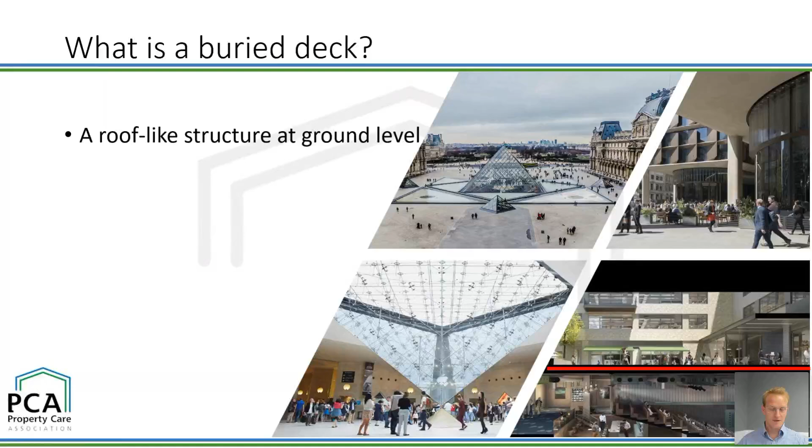Just an aside on this - Dr Ricky, apologies, I can't remember his surname, but he's going to be covering some of the nuance of fire and water and the interaction between them at the waterproofing conference next month in November. There's an interesting history there between fire, smoke vents and things like that, and waterproofing, because these are really challenging waterproofing elements.

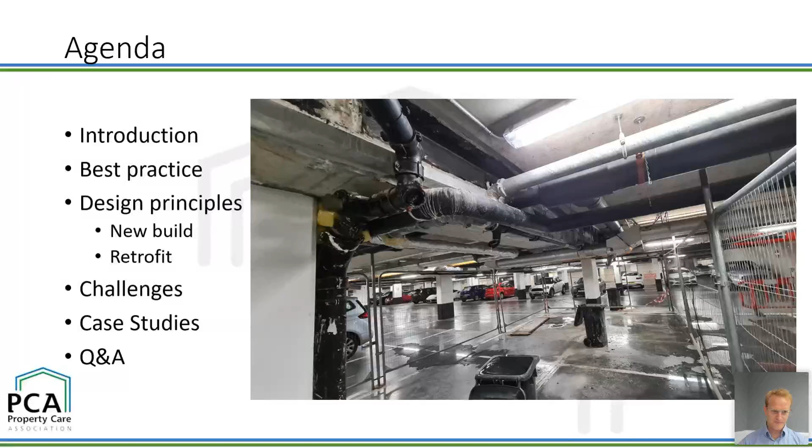So my name is Ben Hickman. I'm currently the chair of the PCA, although very soon I'll be handing over to Emily Walker, who many of you will know. She's excellent at waterproofing and will be a great addition to the PCA as well.

I'm the founder of CLW, and this week has been really exciting. We've had Andrea start as our practice director, so I've got a team that I'm really, really proud of. Andrea's an architect, Johnny's a structural engineer, Alan's an architectural technologist, and I've got various sort of backgrounds. So a team of 4 very accomplished and qualified waterproofing consultants.

We love working on big, complex basement waterproofing schemes. There's a QR code there that will take you to my LinkedIn profile, which is my social media poison of choice. I'd love to connect with you there. Vector is another company that I co-own, and we do really complex leak detection, a lot of that's to do with basement podiums. That's why I'm mentioning that, and I'll cover some more of that later.

I was on the committee that did the revision of BS 8102. I was a technical author of CIRIA C817, which is about blue roofs. I do a lot of expert witness work, and I've got some qualifications.

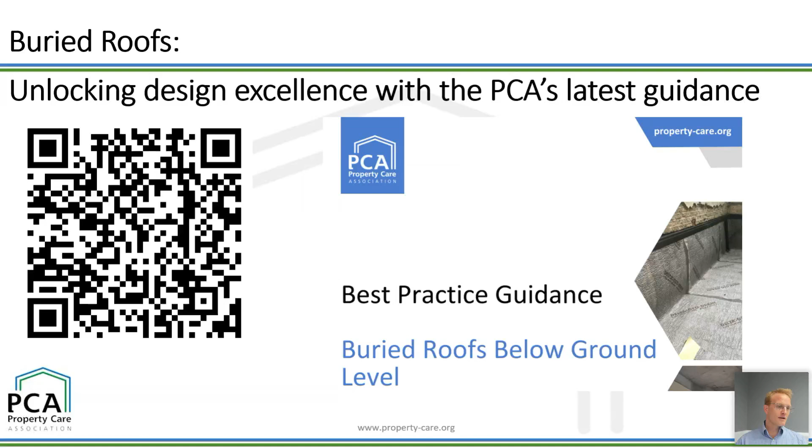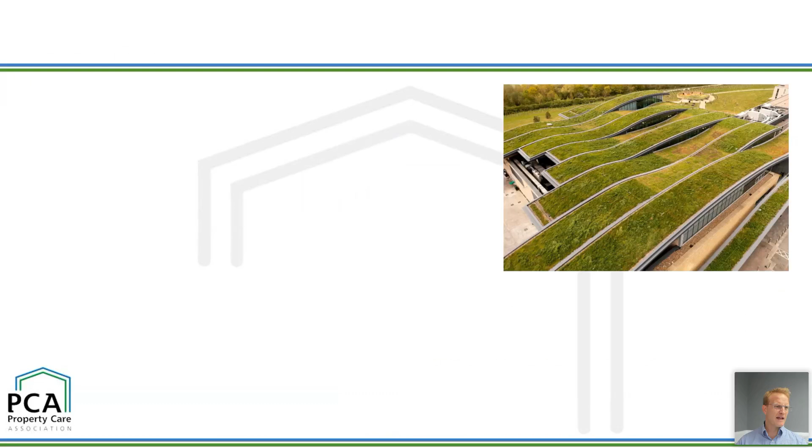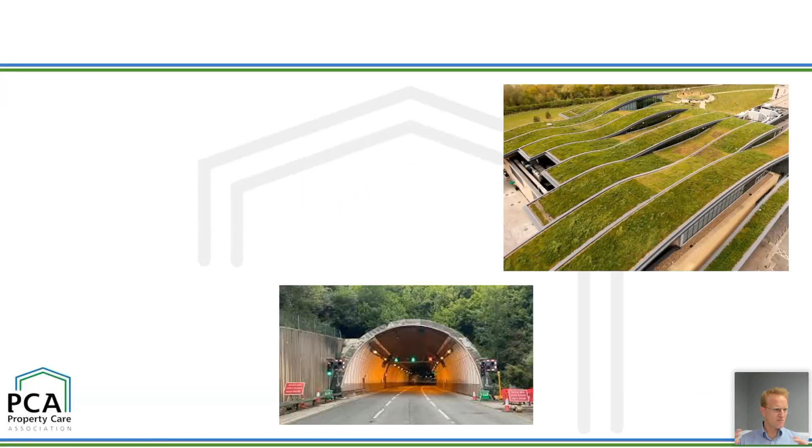So, what is a buried roof, and is that any different to, for example, what's here is a green roof, a really complex green roof, and that is a roof, and it is buried. There is a sort of planting of some sort on top. Here's another building element, and it's buried, it's a tunnel, and it's got a roof kind of structure. Is that a buried roof?

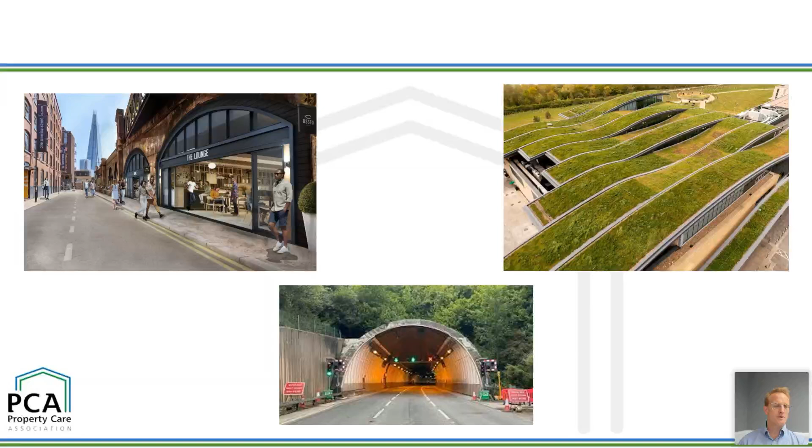And here's another example of a commercial premises in the brick arch vaults of a railway bridge. Are those buried roofs? Sort of, and sort of not, and it's difficult to differentiate and define, but there are certainly elements of a roof, and the roof primarily is a structure that protects the rest of the structure from the elements, particularly water. All of these structures are doing that, and buried roofs below ground level are also doing that. However, there's some nuance and some difficulty and challenges.

And here's an example, this is an AI generated image, but because buried decks at ground level are at ground level, it is feasible in lots of circumstances that you might have, for example, an emergency vehicle. The dynamic loading that introduces is really quite significant. How do you design for that? I showed an image previously that had a MEWP on it.

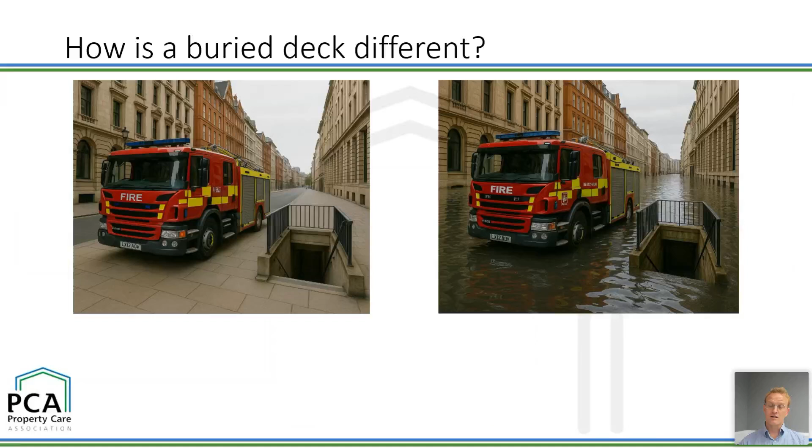Now, obviously, that introduces loading that you wouldn't necessarily plan for. And that loading goes all the way from finishes through potentially drainage layers and things like that, through to the structural deck. That brings in some challenges and difficulties. And here's another kind of challenge and difficulty at ground level that you don't have on roof structures, which is flooding. Surface water flooding in cities where you get a lot of these structures is increasingly common, and brings some real challenges about how do we waterproof these structures.

So best practice guidance - I've mentioned BS 8102, the guidance on protecting below ground structures from water ingress. BS 6229 is about flat roof structures, and there's a lot of comparable and relevant information there. This PCA guidance is very relevant. And I mentioned blue roofs because there are some similarities there, and very often a blue roof is placed on a ground level buried roof.

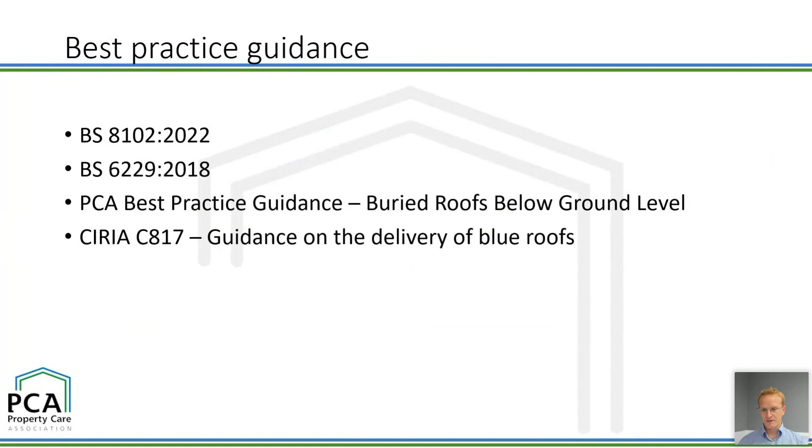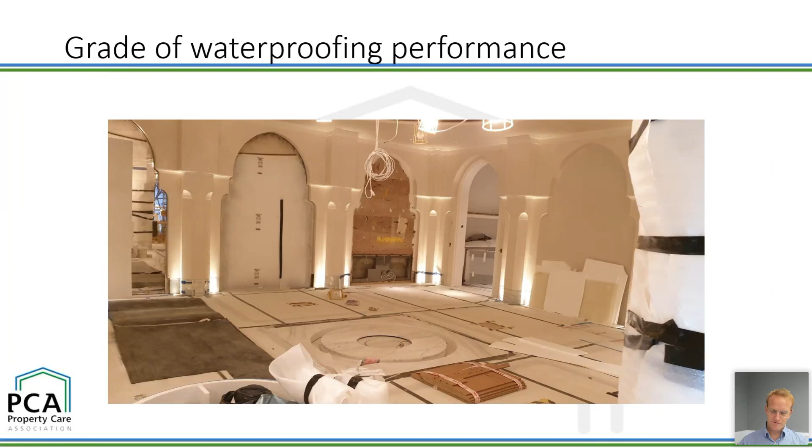So if we start with BS 8102, we should begin with a desktop study and looking at the structure. And then very importantly, how dry do we need that space to be? What's the grade of waterproofing performance? This image is of a very, very posh environment that obviously needs to be dry.

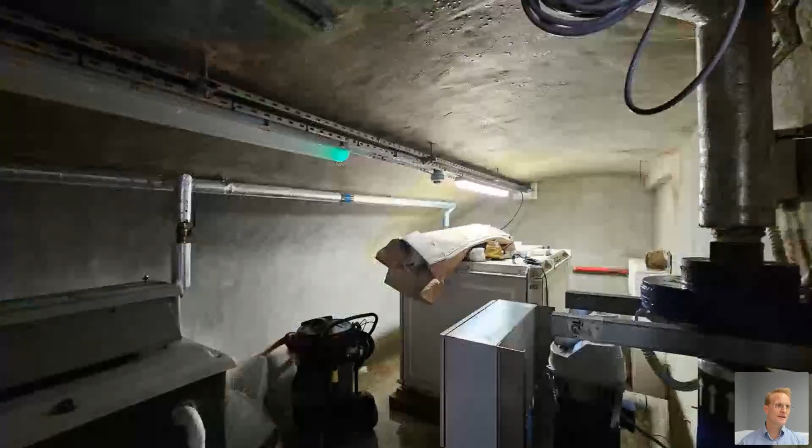This image is of a very rough environment that perhaps doesn't need to be dry - that's a sort of London Victorian coal chute, coal store space. Does that need to be dry? You could debate it. Here's a similar structure, and it's got some type A cementitious waterproofing, and it's containing some plant space. Is that performing adequately? There's condensation up on the soffit.

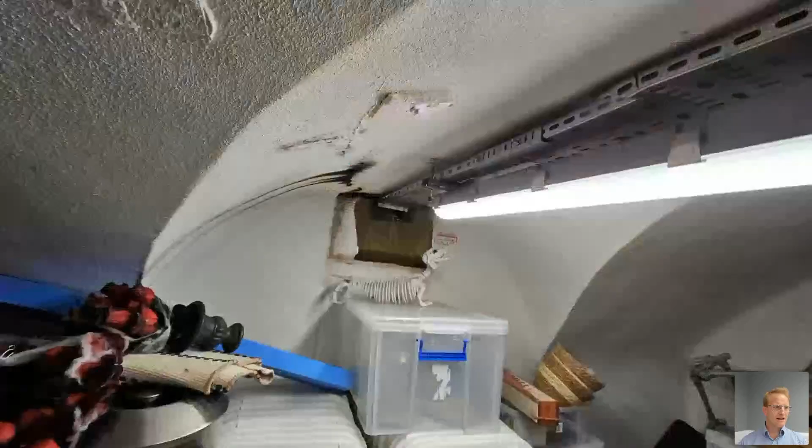Maybe, maybe not. And here's the same structure in a slightly different setting. Is that performing adequately? How dry do we need that to be?

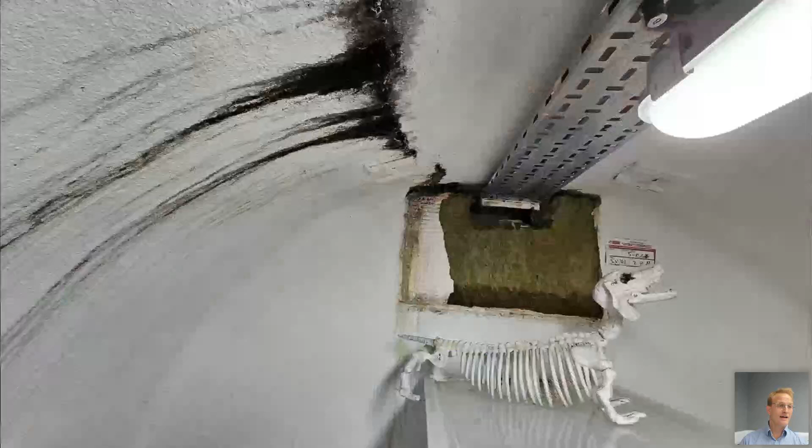I laughed when I saw this on site because there's this very bizarre dog skeleton. But you can see there has been some ingress through the cementitious type A system. But what really caught my eye is that there's this fire compartmentation that's clearly been damaged by the water. And if I zoom in a little bit, there's your fire compartmentation and the dog skeleton.

And the seal - the fire compartmentation people have put a sticker next to the seal saying, if this is damaged, please report immediately. Again, the fire component is very significant when it comes to these buried roof waterproofing elements.

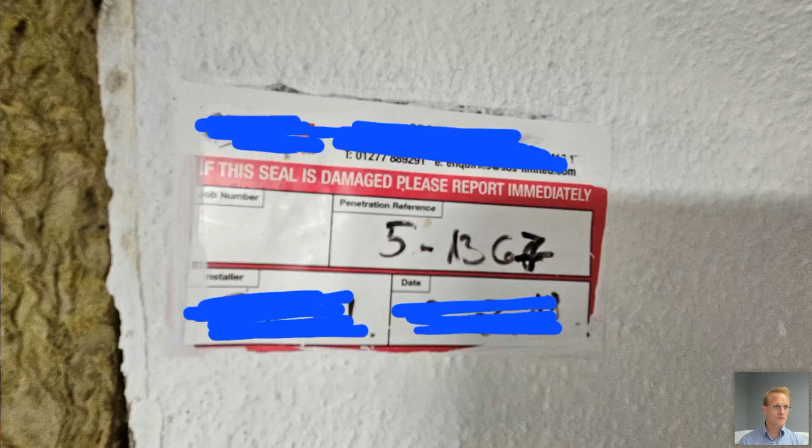So when we ask ourselves, how dry do we need this to be? Often it's not as simple as the finishes, which is how I would normally think about it, or if it's a plant space, maybe it doesn't need to be quite as dry as the posh residential below ground space. Fire compartmentation, if that's getting wet, can have very serious implications, and post Grenfell we should all be very aware of that.

And if you were to combine the risk of perhaps an EV, an electric vehicle fire, which is very high temperature and very hard to put out, with a below ground space, so there's very little room for heat to dissipate, and a steel frame structure where the fire protection is damaged, that's really quite concerning and could lead to rapid structural collapse, for example. So when we think about what grade of waterproofing performance we need, I would urge us all to think about fire and other fixtures and fittings.

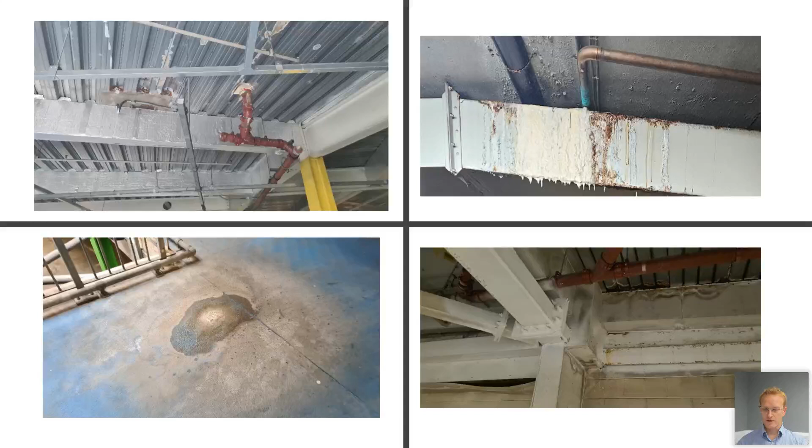I've been called to one where the fire alarm system was being damaged by water dropping onto the fire alarm sensor. And so the fire alarm was going off all the time on this commercial premises. That was having a big impact.

There's lots of leaching from the concrete. If you leach lots of minerals out of the concrete, you lose the passive protection, and then the rebar can corrode, and that can cause spalling. So you've got popping of concrete on a structural element that has significant punching forces. So again, structural implications - how dry do we need it to be is a very important consideration.

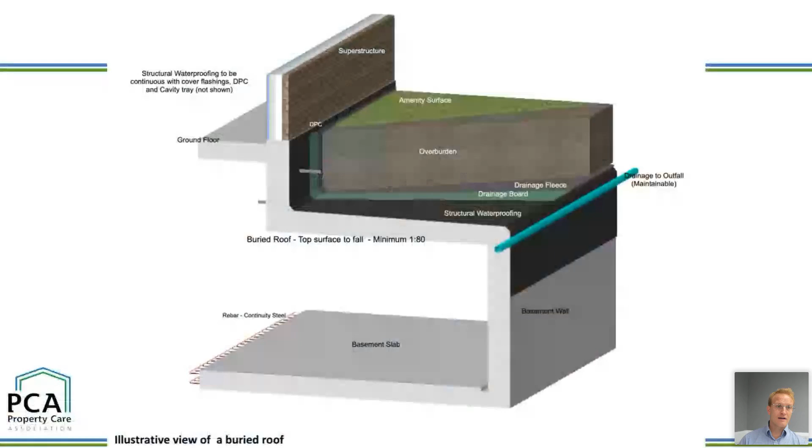What else matters when we think about waterproofing design? Here is an image from the PCA guidance document, and you can see the complexity. There's lots going on here. We've got a deck that's cast to falls.

We've got a waterproofing layer, a drainage layer, and land drains. Land drains need to be able to discharge somewhere with permission - that's tricky, and it needs to be maintained. There's all of the nuance of how you terminate this and interface with the DPC. This doesn't have any insulation, so is there a condensation risk?

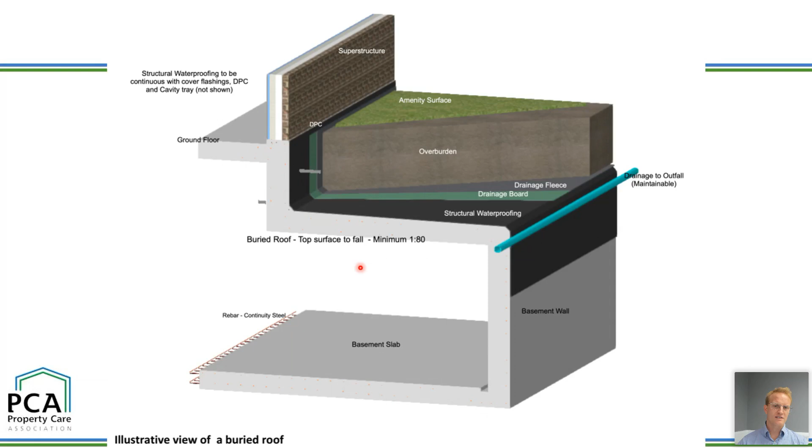So there's lots of complexity to a buried roof system. But one thing I want to highlight is the challenge that traditional design teams would have a lead designer for the substructure, normally the structural engineer, dealing with the foundations, and a lead designer for the superstructure, normally the architect. So if you've got somebody owning all the design responsibility and coordination above ground and the substructure, you can often get a gap between the top of the capping beam and ground level where you don't actually have a lead designer.

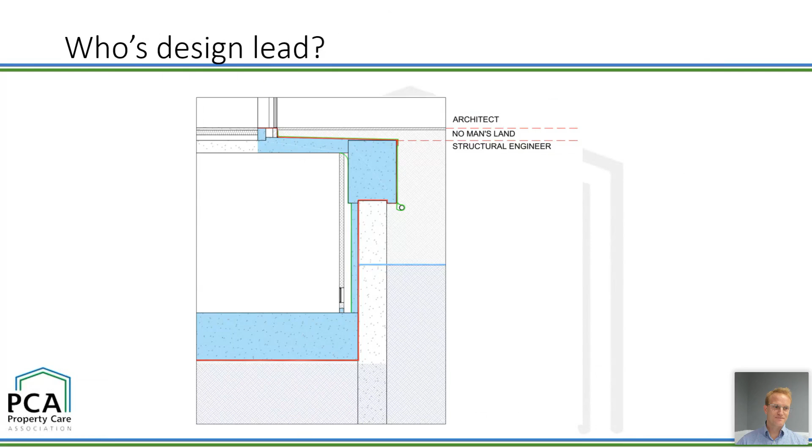And that's where all of this waterproofing design is occurring for a buried roof system in most situations. So it's a matter of a lot of significance and has a big impact in our world.

So what is the design philosophy? Firstly, I'd want to point out that we need to have a waterproofing specialist, and BS 8102 highlights this - particularly for a cavity drain system installed to a soffit, but inverted applications are deemed to be higher risk, and therefore specialist designers and installers should be included from the outset. So there's a particularly high risk element highlighted in BS 8102.

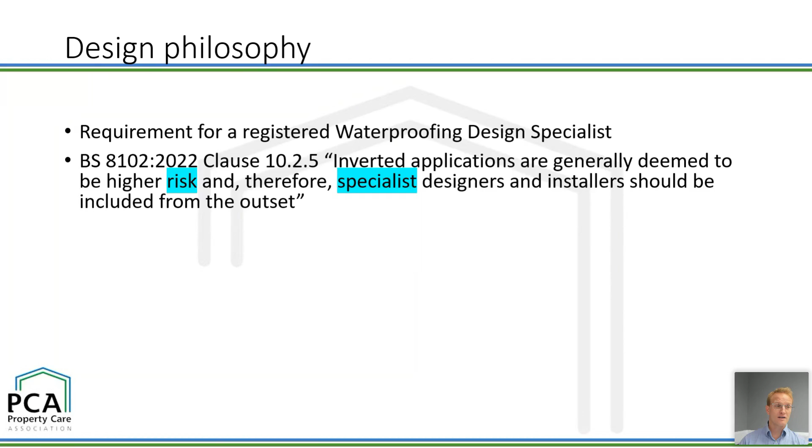This PCA guidance document also highlights the need for a waterproofing design specialist. And then also in BS 8102, clause 4.2, a waterproofing specialist should be appointed. And that's a very important word - it's very contractual sounding.

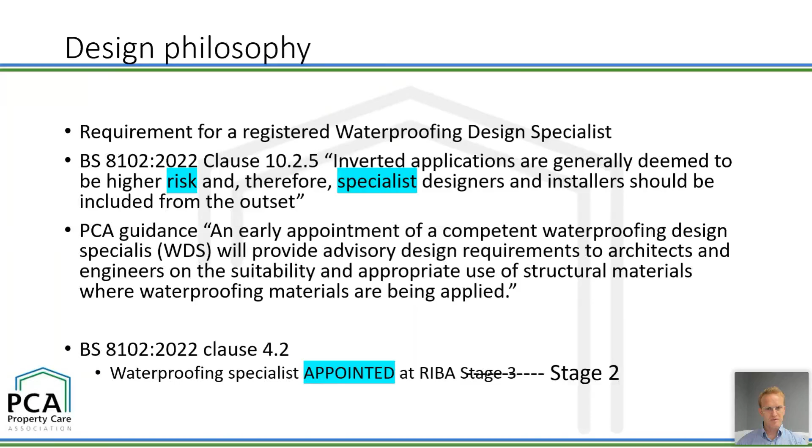A contract is offer plus acceptance plus consideration, and that's very important for the end users and the clients. Not only was a waterproofing specialist somehow involved in advising on the waterproofing design development, but they actually are appointed, which means they're responsible, and there's recourse if they gave bad advice. This mentions appointed at RIBA stage 3 - I'd actually highlight it would probably be better to have them at RIBA stage 2.

I also want to point out this concept that there are things that we know, and there are things that we know that we don't know. But there's this very interesting element of things we don't even know that we don't know. All of our professional standards or codes of conduct would be very explicit that we should only do work we are competent to do - we shouldn't go beyond the area of our expertise.

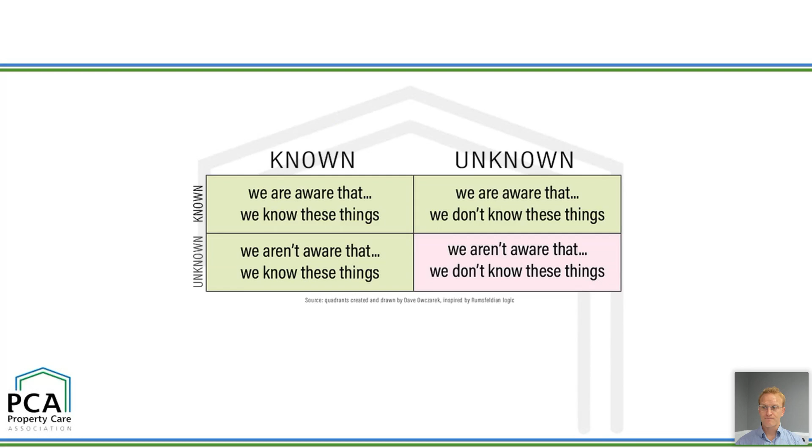And on buried roofs, I see a lot of architects in particular taking on the design development, and really, they're not waterproofing specialists, and they don't even know that they don't know some of the issues at play here. That's a very risky thing to do, something I'd urge you not to do. Really, you should appoint a waterproofing design specialist.

I also just want to labour some of the contractual risks. It's very important that we are aware of these, because I don't want people to get into difficult situations with claims of professional negligence.

I mentioned that I do a lot of expert witness work. I was recently on a call with two solicitors and a barrister as they prepared some documents, and they were asking me what is the standard you would expect from a competent waterproofing contractor, because that's the test for negligence. If you do something that's not even as good as the standard we'd expect from a reasonably competent waterproofing designer, that's negligence. I was explaining to the barrister, well, actually, I think most people in the industry wouldn't do X, Y, Z.

I would urge you, if you are a waterproofing specialist involved in designing something, the burden on you is really quite significant. It's not enough to take comfort from 'oh, so-and-so does it like this as well.' This has really come to the fore since Grenfell, and the phase 2 report states very clearly this burden on professional designers.

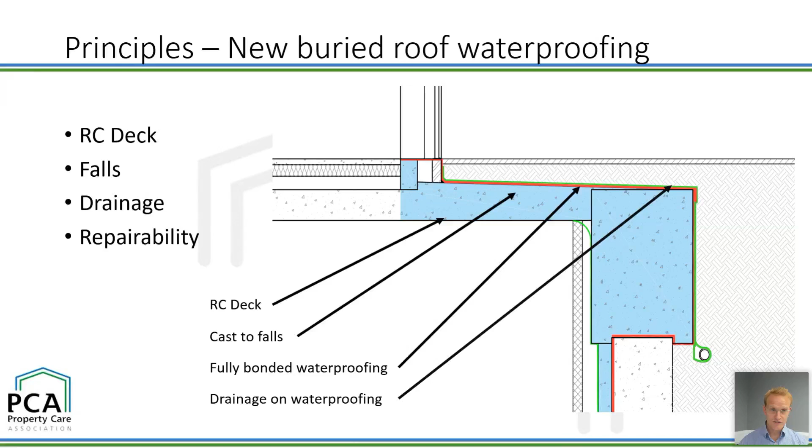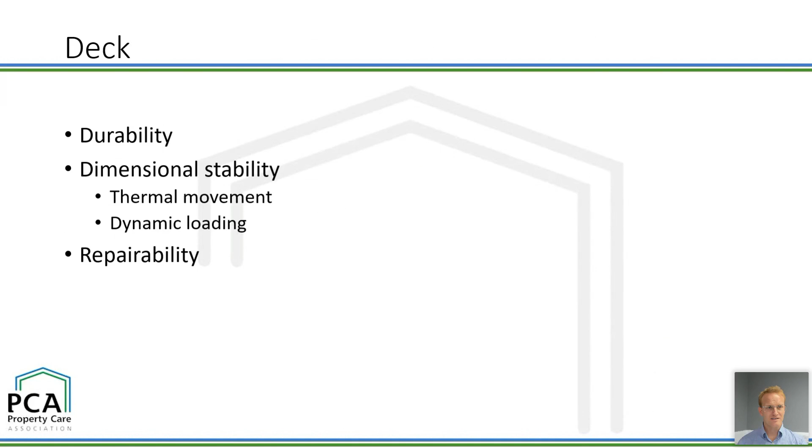So why would we want a reinforced concrete deck? That's quite a reasonable, legitimate question. I've summarized some of the things here, and then I'll show you a bunch of images and talk through in more detail. Firstly, we want durability - if there is water ingress, what happens? Concrete is more durable than a lot of the other options. We want dimensional stability because that really helps the waterproofing. And we want something that is repairable. I'll dwell on the repairability quite a lot - bear with me, I hope that's valuable.

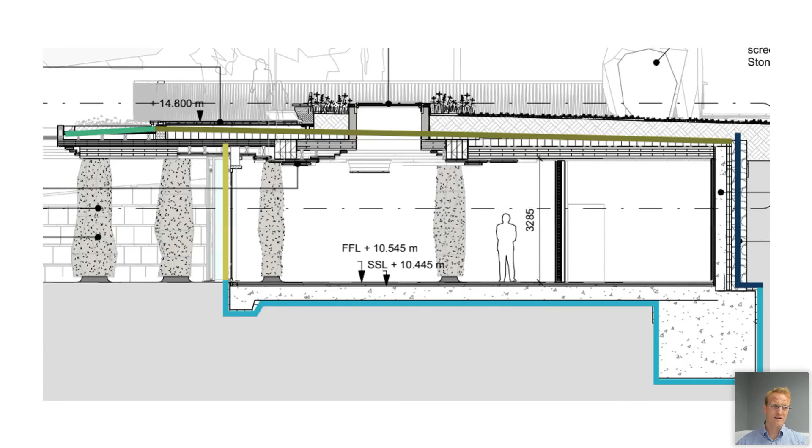So firstly, durability. Here's a picture of a development, and it's into an incline, and the architects came up with some lovely detail about the lawn flowing over the structure. This here is the green roof, but it's a green roof on a timber deck. I saw that and was very nervous and thought, I don't think that's an okay design. They've since changed that design.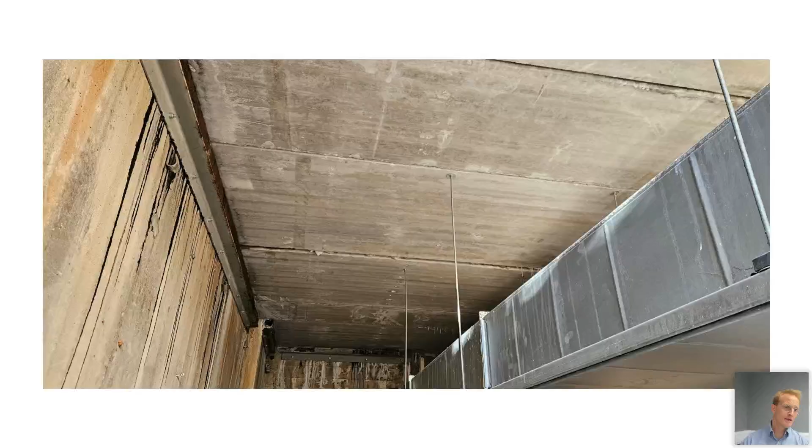And here's a composite metal deck, I showed you that image earlier. There's a real challenge with composite metal decks where if you get water coming through the podium, it sits within the concrete and sits on top of the permanent formwork, which is largely waterproof, and then comes out through penetrations or joints. Again, the point of ingress has no correlation to where the defect is in the waterproofing.

And finally, here's a reinforced concrete deck, and it's dimensionally stable, and it's durable, and it's potentially repairable. We'll talk about that in a second. I'm just going to take a swig of my tea.

So we want a reinforced concrete deck, and we want falls. I just wanted to labour this - there seems to be a lot of misunderstanding about zero falls. The roofing industry is full of this. It's quite frustrating, where flat roofs aren't flat, and zero falls actually means you need falls. In CIRIA C817, we came up with a new term of absolute zero gradient, which means that you need to have a slight gradient.

So just be aware, on all buried roofs, you need falls. Even if you find a product that says 'oh, you don't need falls, this is approved for zero falls,' you still need falls. Back falls are not acceptable, and you need to allow for deflection.

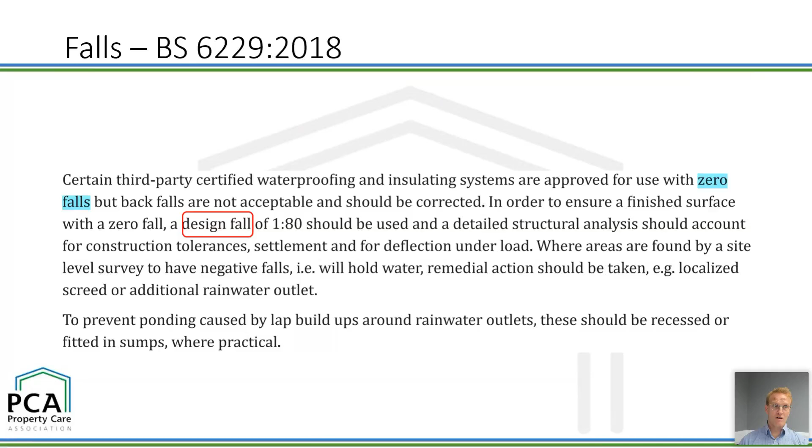So yes, we must have falls, and if there are dips in the deck, they need to be removed. And I would also highlight that outlets often need to be recessed in the podium deck.

Typically, our threshold level will be set by highways and proximity to highways and access, and that's normally a very fixed position. And then we would have somewhere over here a capping beam, and again, that's a very fixed position. And then we would normally have a services zone, and we can't go below that.

Structurally, and cosmetically, you normally want outlets near the columns so that you can hide them. But the point of greatest deflection is exactly midway between two columns. And so we've got to achieve the 1 in 80 fall above the deck. And then also the drainage needs a fall in order to get self-cleaning. All of that is coordination heavy.

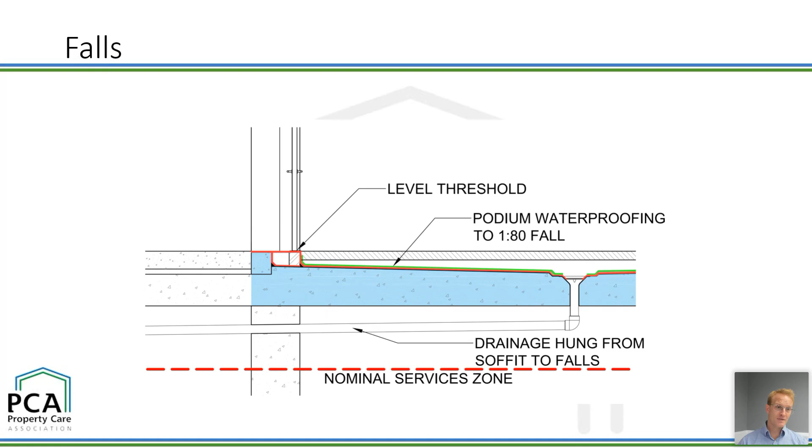And then obviously we want drainage, and we would all be familiar with, there's a drainage layer in terms of how much drainage, how many outlets. There's BS EN 12056 and some calculations around that, rainfall intensity and things like that.

And then you'd have queries about, well, how much of that water do we think is going to go into the surface water drainage and the ACO channels, and how much will percolate down and hit the waterproofing layer? Lots of complexity, and more complexity to do with maintainability as well.

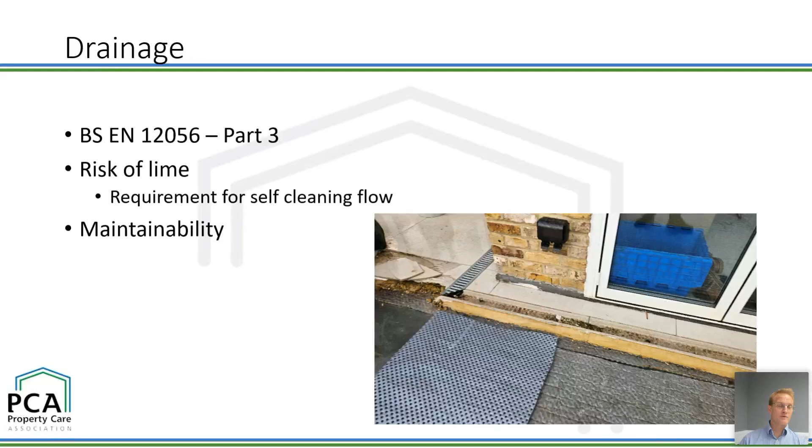And I think historically a roof has been, if you have a leak, you go up onto the roof and you fix it. But increasingly, roofs are buried structures themselves, and you would have photovoltaics and plant and green roofs and insulation. And actually, it's very difficult to find leaks on roofs now as well. And there's an increasing pressure to make sure that roof waterproofing is repairable as well.

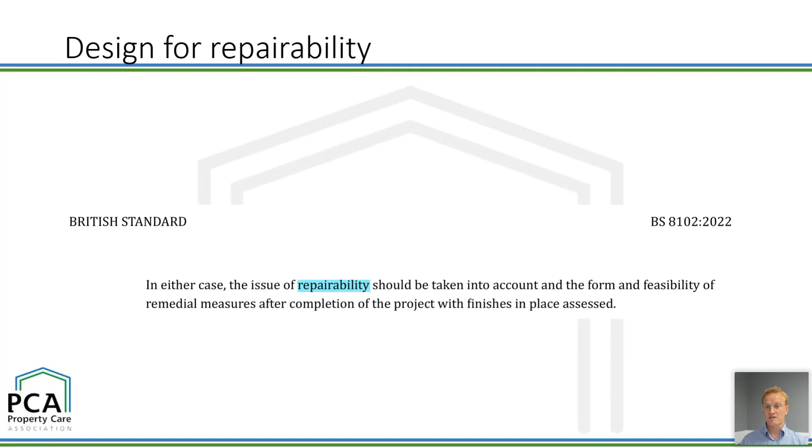But if you want to repair a buried roof waterproofing system, there are several challenges, but one of the biggest ones is, well, where is the leak? And another one is, well, can we get to it? And potentially, if we have a reinforced concrete deck and a fully bonded waterproofing system, maybe we can pursue a resin injection repair.

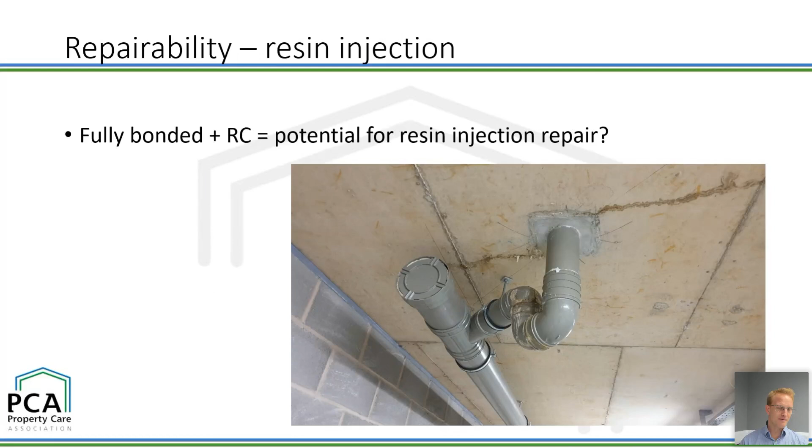They're often unsuccessful, and lots of challenges there, but let me dwell on the repairability piece for a moment, if I may. So if we want fully bonded waterproofing, that has to be adhered well to the substrate. And here is me doing an automatic pull-off test to say, yes, this is very well adhered to the substrate.

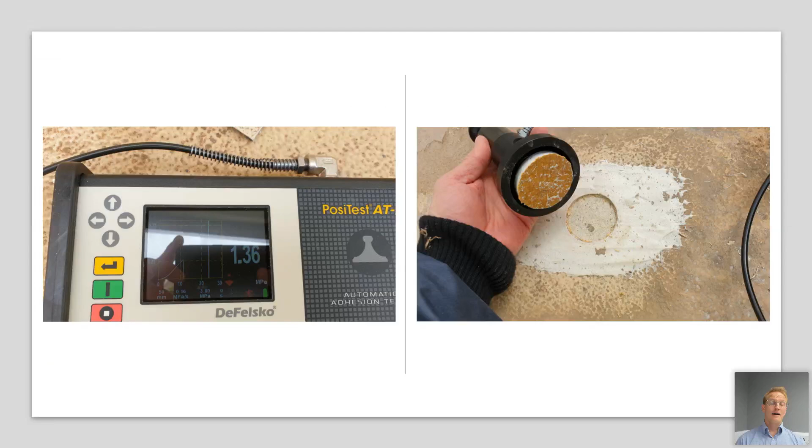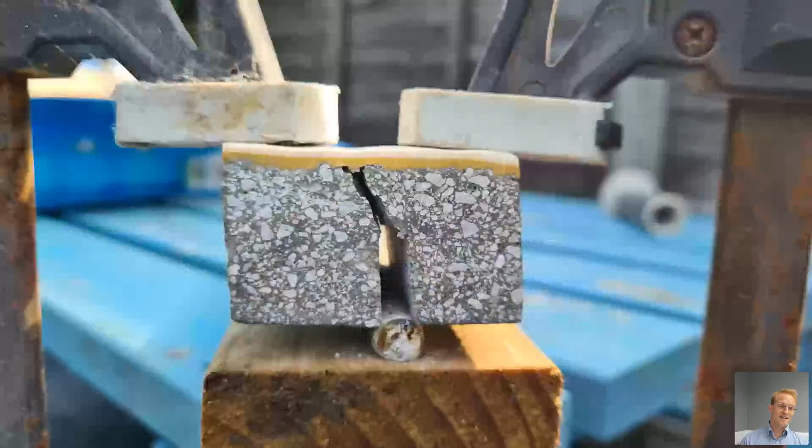But if it's well adhered to the substrate and the substrate has a crack in it, then the waterproofing has to stretch over that crack. And this crack here is 0.7 millimeters. And here is me showing a very crude experiment in my back garden on, here's fully bonded waterproofing, and that's onto a substrate. And I've created a crack, and then I'm stretching this upper surface with these clamps that are forcing down. And over here, you can see the waterproofing is having to bridge the crack.

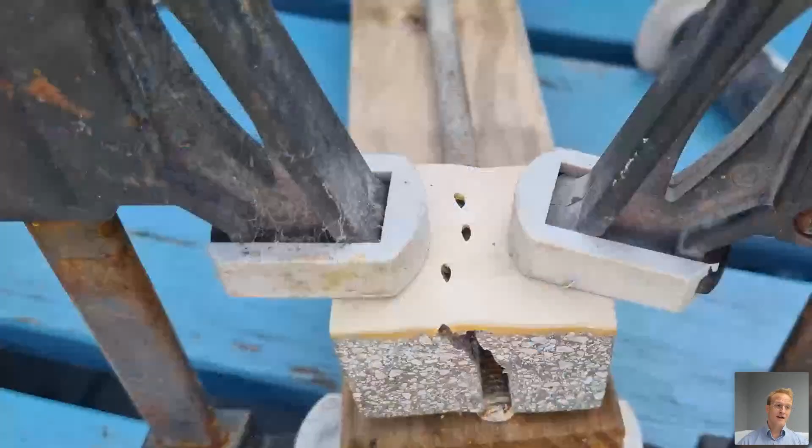And if you keep stretching and stretching and stretching, you get something like this. And these splits are holes in the waterproofing. And obviously that is a point of ingress. Now, this product is actually stretched a huge distance, but that's installed in lab conditions, and it's particularly stretchy material as well.

So there's actually a real benefit to something that isn't fully bonded, because much more of the material can stretch over cracks. And so we have this challenge here of, there are some benefits to fully bonded, because maybe we can repair it, and maybe we can do some resin injection, and maybe we're more able to say, well, this is likely where the defect is in the waterproofing, and that's likely to correspond well with where does water come in to the structure.

A loose laid system that's separate from the structure allows more of the material to bridge gaps, cracks, and movement, so there are benefits there. The challenge with something disconnected is this: you could have waterproofing at this level as a loose laid system, and if you've got a defect in this location, water can come through this void or insulation and spread all across your concrete deck, finding a point of ingress that bears no correlation to where the defect actually is.

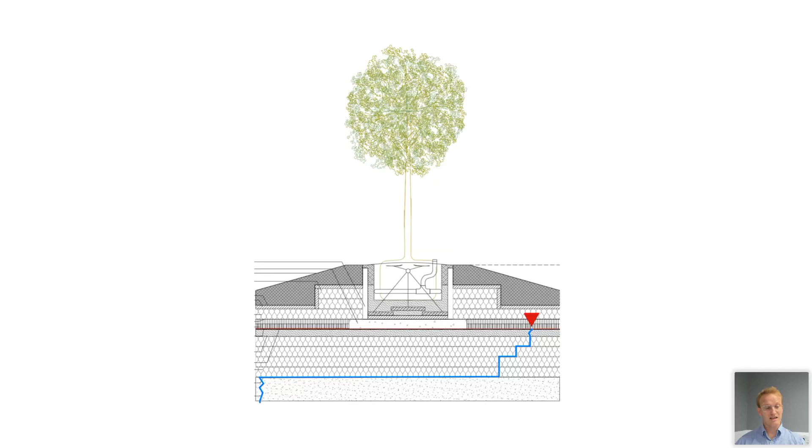And then is that repairable? Well, if you can't find the defect, no, it's not repairable. I guess the other challenge is if the defect is under your mature tree or under a tree planter, can you even get to that and repair it? There's a lot of challenge there. So repairability from above involves firstly locating it, then exposing it, and then making good.

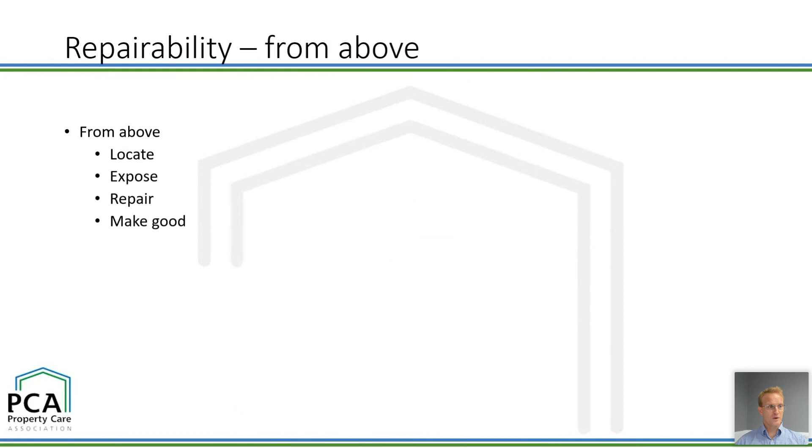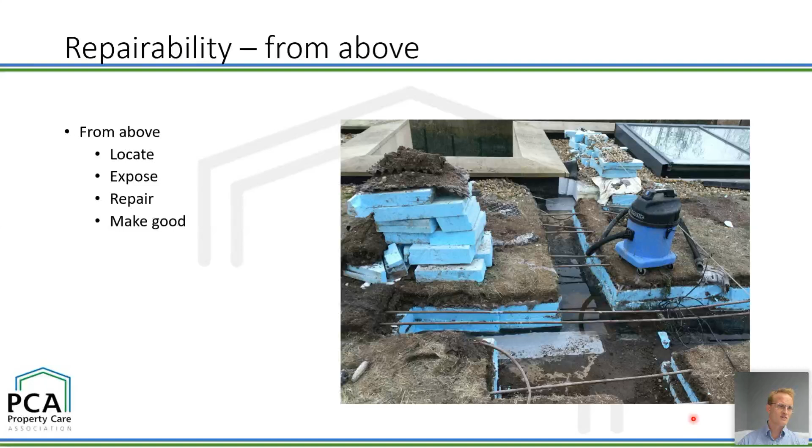Here's an indication of trying to locate a defect in waterproofing. You're removing different bits of overburden and trying to wet vac out so you can see the waterproofing layer, and in the process you're disturbing things like irrigation systems. Here's another one, a blue roof, where the ingress could be anywhere, and in the meantime you're damaging some of the blue roof system. It's difficult and challenging.

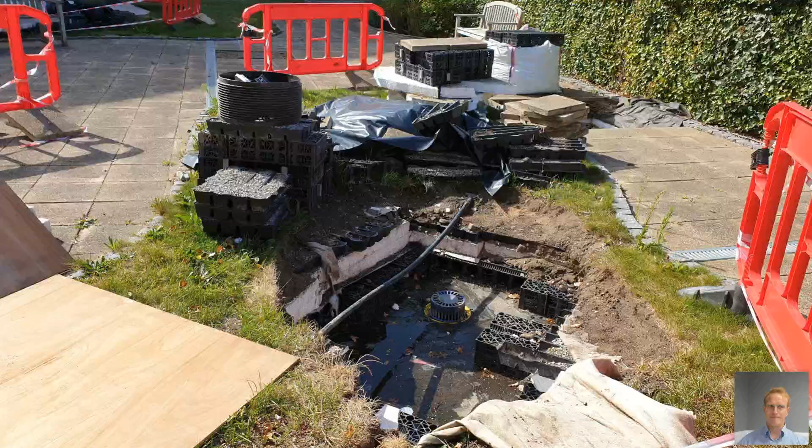That's what we do at Vector, where we've partnered with an organization in Germany and do very complex leak detection, which I'm really pleased with. We do lots of leak detection in green roofs and similar structures, mapping the electrical flow through these varied structures to say, our point of ingress is here, then we can do localized exposure and repair.

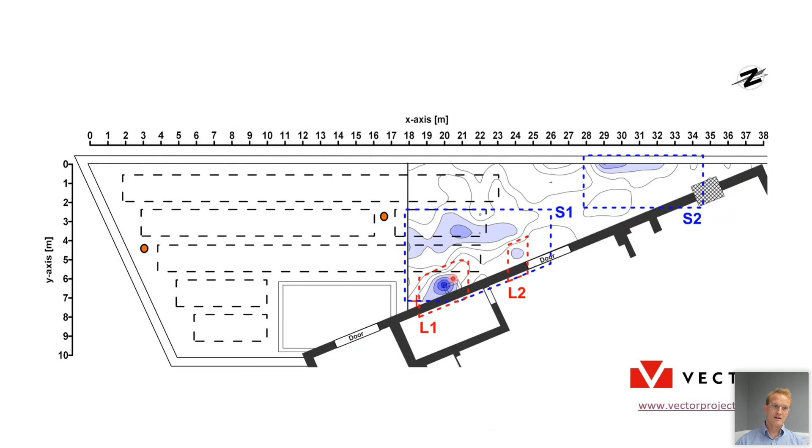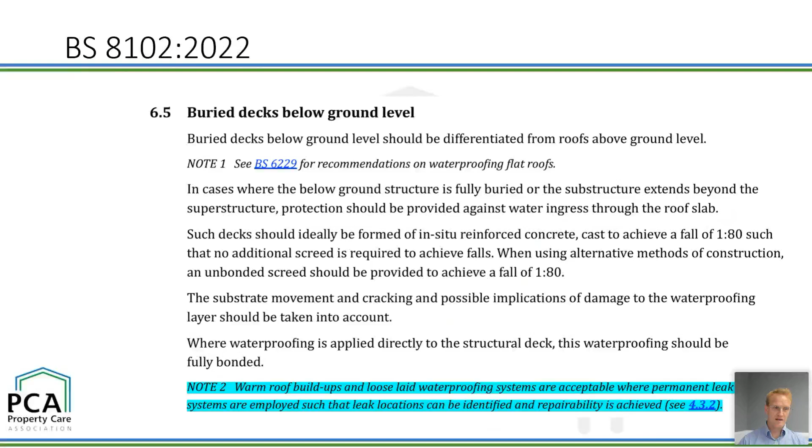I also wanted to highlight this because I think it can go unnoticed. In BS 8102, there's quite a clear note that says if you pursue a warm roof buildup—and there are a lot of benefits to that, where the insulation is kept warm and you can achieve falls through tapered insulation—if you do take that route and your waterproofing is disconnected from your structure, it's important to make sure the leak location is identifiable in order to make it repairable. So permanent leak detection should be employed.

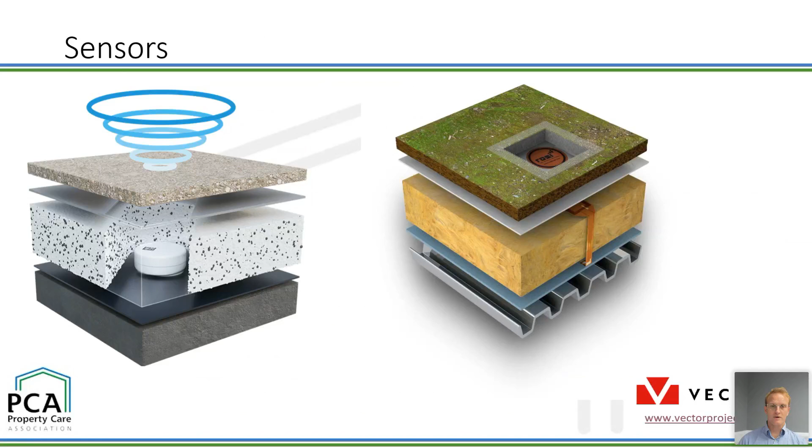Similarly, CIRIA 817 says the same thing. And again, this is something we provide at Vector, and there are several different options I'd love to chat about.

So that's all kind of new build design content. I think I'm running a little bit late, so apologies. What do you do if it's actually an existing structure and you can't get down to the deck from above to waterproof from above? Here's an example of what can be between the pavement and the structure you might want to waterproof—there's a lot of utilities, for example.

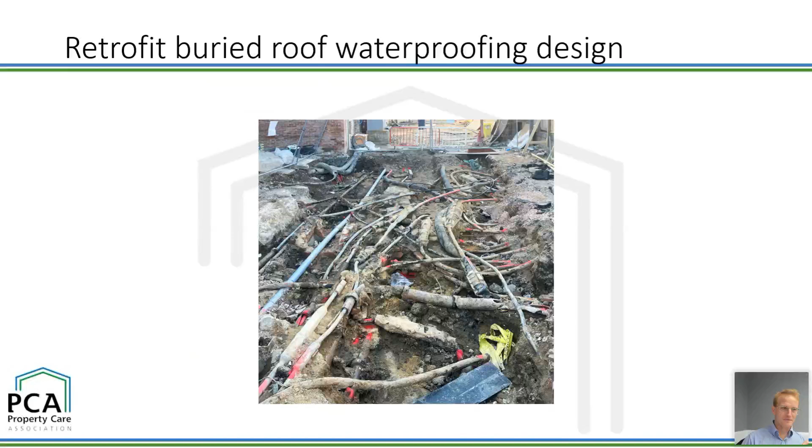Well, you've got immediate options of type A waterproofing, and I'll come on to type C, but type A has significant challenges with movement. I've already mentioned dynamic loading from, for example, a fire engine, but even if it's just near a road, the consistent movement can be particularly challenging for cementitious systems. Then we have big challenges about where to terminate that waterproofing, because it needs to finish at some point above ground level, and we can't necessarily get there.

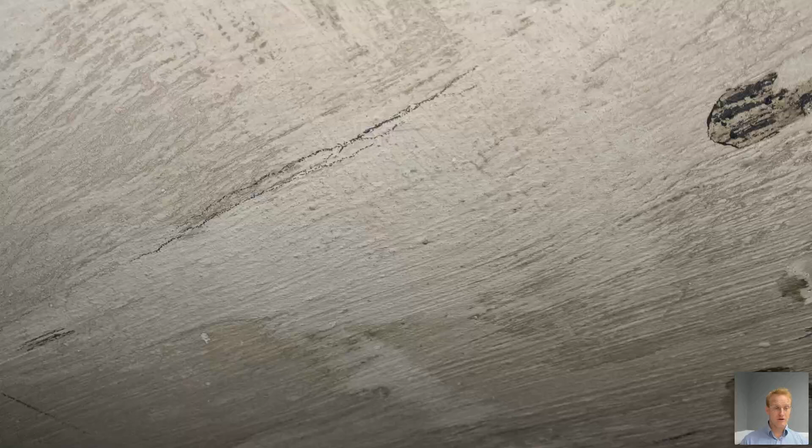Here's an example of a cementitious waterproofing system—they are typically very, very rigid, so if there's movement to the substrate, that's going to be problematic. This is one where somebody was trying to install it while there was active water ingress, so before the cementitious system was curing, water was coming through it.

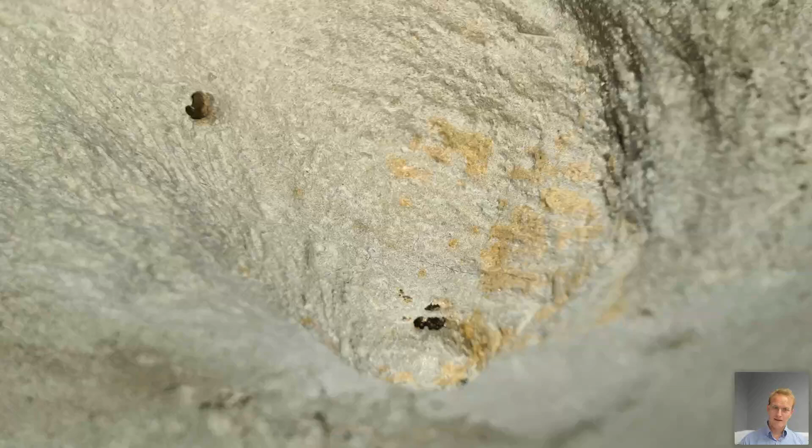And again, terminations are really awkward around an entrance, a door frame, or a downstand beam, anything like that—very difficult to design and install well.

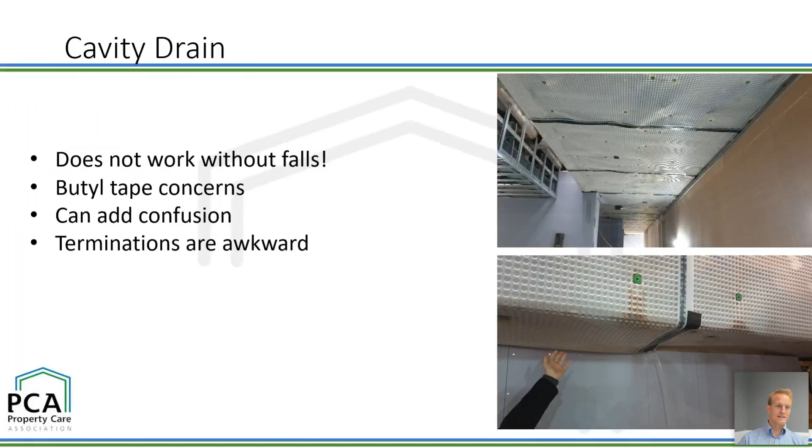Let me race through some other challenges and considerations. Condensation is a huge one and needs a lot of thought—we ought to be aware of vapor control layers, insulation, heating, ventilation. Termination I've mentioned a few times, but that's termination if it's above ground at capping beam level, but then also interfacing with a damp-proof course. You'd want that to be 150 mil above ground level. That gets awkward if you've got a level threshold or a door frame that needs to drain water, or anything of that sort. Movement joints are always tricky.

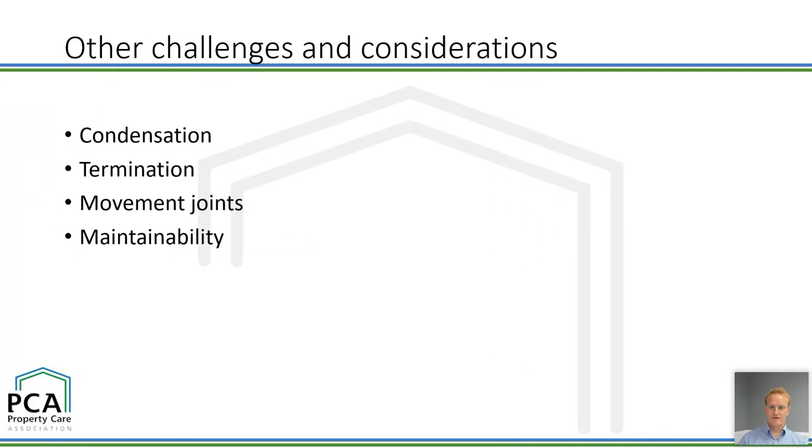Maintainability is very often overlooked. How do you get to the different elements and make sure that drainage is maintainable? And then lastly, flooding, which we've mentioned, but is obviously a big challenge.

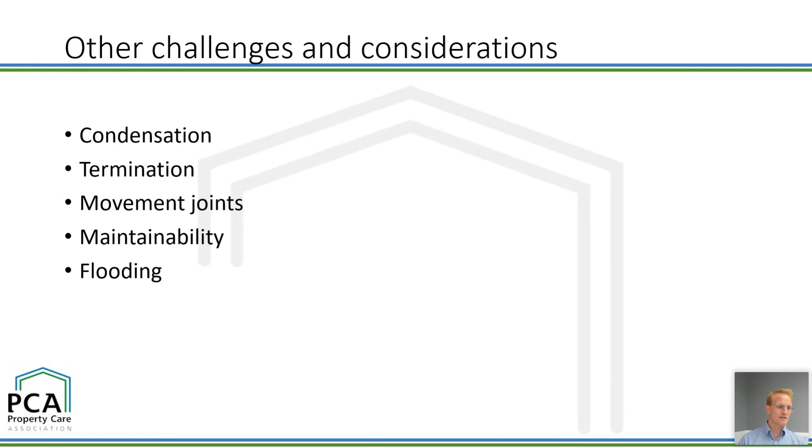I've taken longer than I intended to with all of that. If I race through a couple of case studies, then I'll hand over to Andy for some Q&A.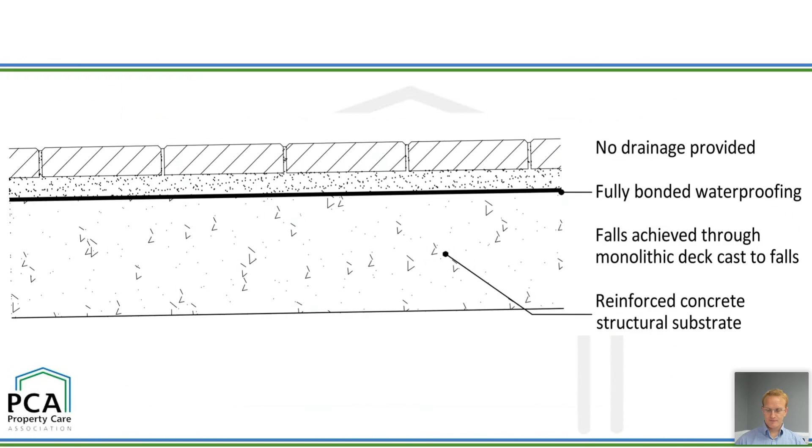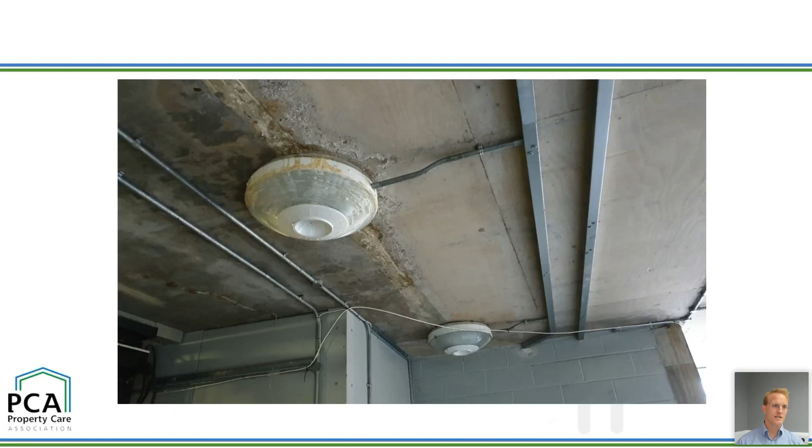Here's one case study, a ground floor buried roof with hard landscaping and some planters. This is the kind of build-up we're looking at: a reinforced concrete deck installed to falls, as it should be, with a fully bonded waterproofing system, but no drainage layer. If you dig into that system, you see there's a lot of water hung up within the bedding mortar, because there's no drainage, there's nowhere for the water to go. As a result, water's coming through the deck with a lot of minerals and leachate, leaving stalactites and things like that. Many of us will be familiar with this sort of Heath Robinson kind of trying to catch water ingress in the cracks.

Andy, do we have lots of questions? Should I go through another couple of case studies, or should we do some Q&A? We've got 15 minutes left, I guess. No, you can continue, Ben. Okay, we've got plenty of time. There's no questions coming at the present time, so continue with the presentation.

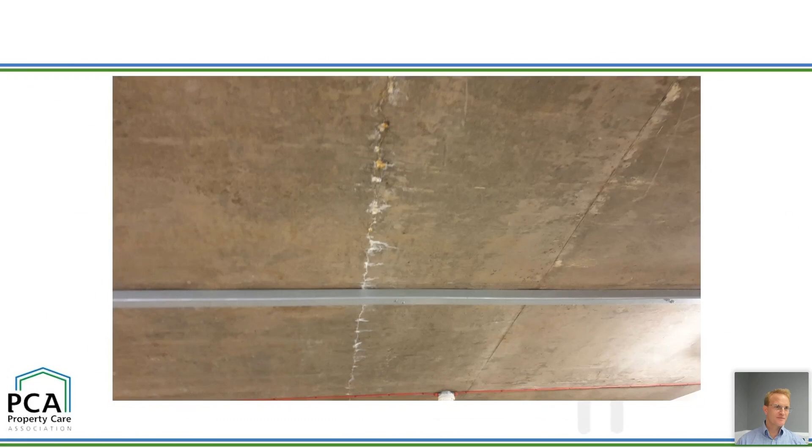That's brilliant. Great, okay. Next case study is this sort of scenario, which I guess I see quite a lot in London, where people have extended under their house and then out into their backyard.

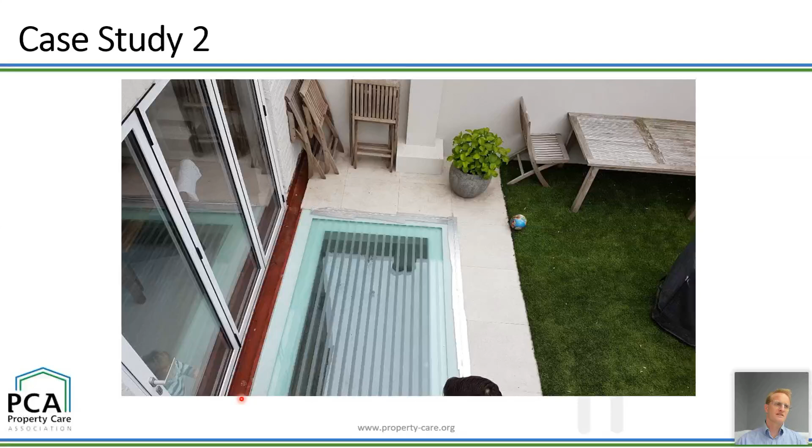Here we've got a walk-on pavement light and some nasty flashing around that to try and keep the water out, and a horrible ACO channel detail there, and a level threshold through all of it. So it's this sort of arrangement: the walk-on light, roof light, skylight is there, then you've got an ACO channel, and then you've got a level threshold door. The door has drainage weep holes through it that lead absolutely nowhere. All of this is on an RSJ, and this is hung on an L bracket. So, huge potential for movement, horrible waterproofing detail.

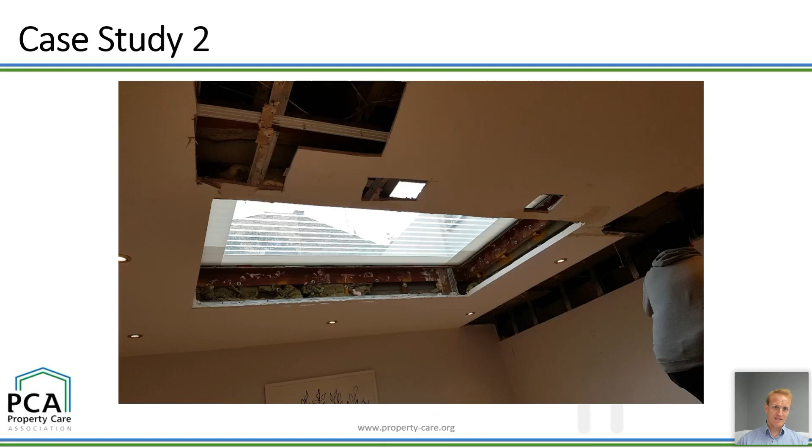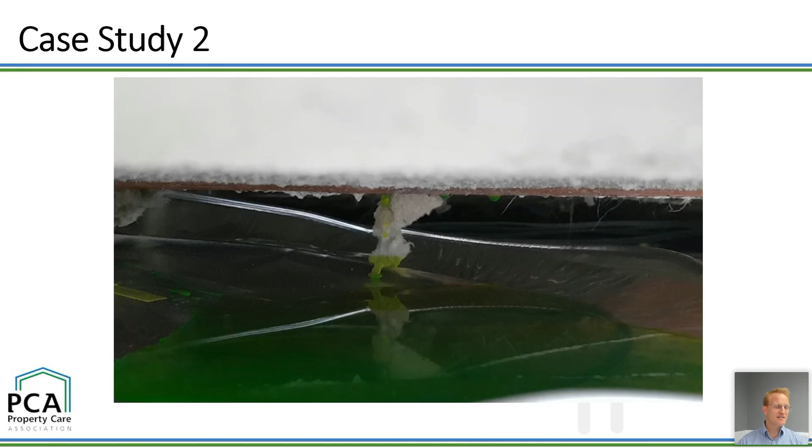And it leaked, and we did some dye water testing, and water came in. I guess I would just, if the audience here is PCA waterproofing contractor members, urge you to be aware of the design responsibility thing. If an architect shows you that and you're the waterproofing contractor, it is incumbent on you to either walk away and say this doesn't work, or to say it needs to be fixed. But it's very difficult for a waterproofing specialist to just wash their hands of it and say design responsibility is with the architect. If you say that you're the waterproofing specialist, you should look at that and say, well, that's terrible, we need to do that differently.

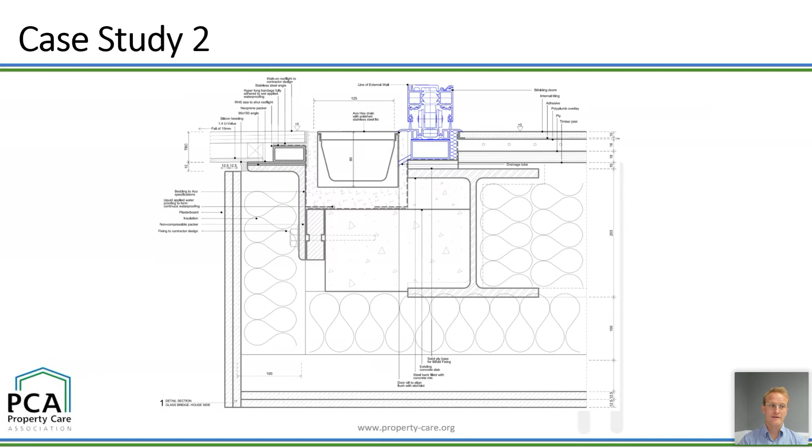So just a reminder there.

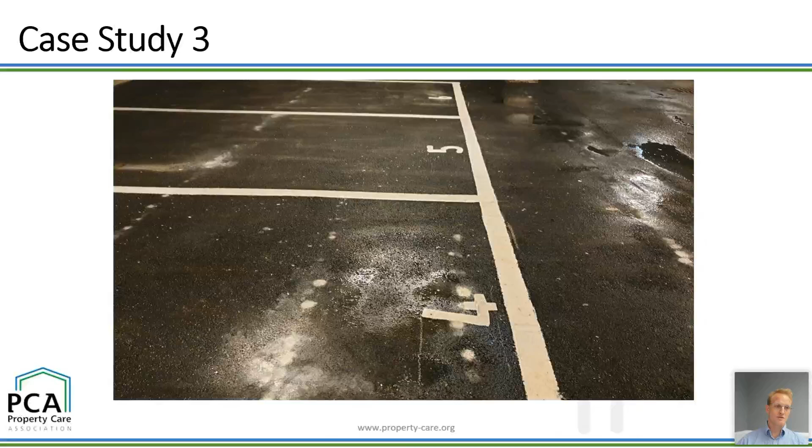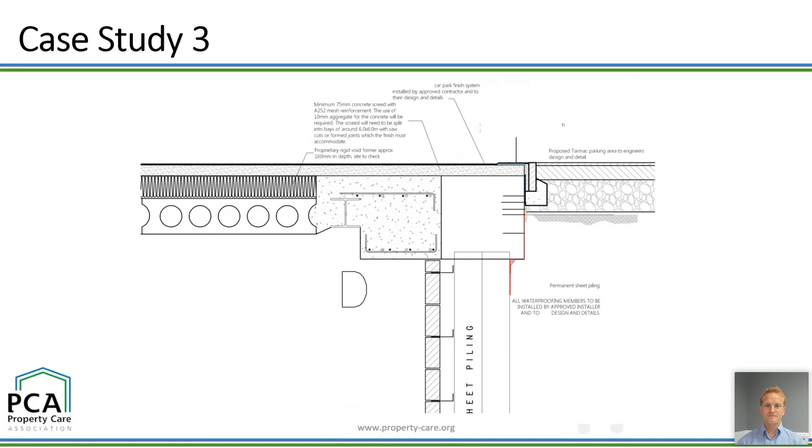Thank you, Ben, for that. It just proves to me that a buried roof is a very complex structure in itself, and there's lots of different nuances with regard to it. It's not just basically plonking a stable platform and putting your amenity space or whatever on top of it—there's a lot of other things which have to be taken into consideration. I know when we were drafting this particular document, we tried to bring all these complexities into it and simplify it as much as possible to give that design guidance.

But there's one interesting point you brought up here, and that was regard to competency and design responsibility. There is a definite link between there, and you highlighted that point within BS 8102 as well, that there is a level of competency. So what's your view on our structural waterproofers, as to what is the minimum standard basically for competency? How do you see that? Great question.